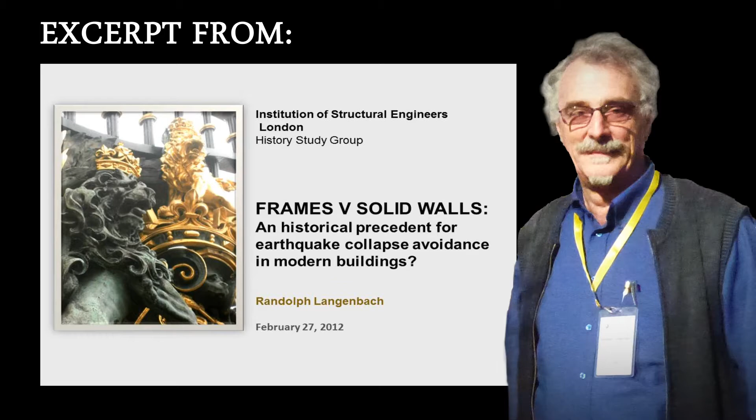It's a real pleasure to be here, and I feel a special kinship to be in Britain, because I took my advanced degree in conservation at York University, the Institute of Advanced Architectural Studies. So here we now move forward.

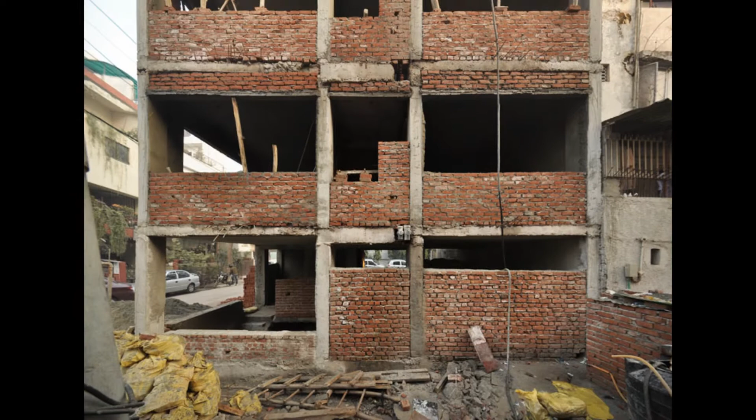And in my talk, I'm going to be talking actually quite a bit about modern buildings. By modern, I mean built in the last 50 years or so, rather than just looking at things historically. But I'm going to be making a crucial comparison. As you've seen in the last 4 or 5 months, we've had a series of earthquakes, and one in eastern Turkey, in Van. What are the images that are coming out?

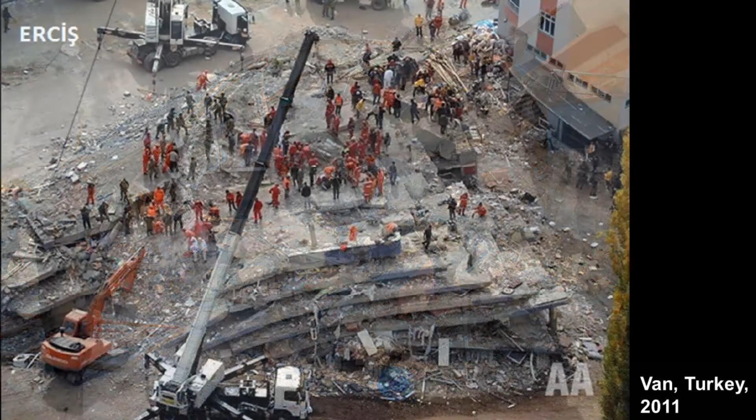They're concrete buildings. Not only have they fallen down, it's really with concrete frame construction that the term pancake collapse was invented, because the floors are so strong. And of course, when they do fall down, it's very hard to extract the survivors, because the floors, as you see here, often very thick, are so hard to even drill through.

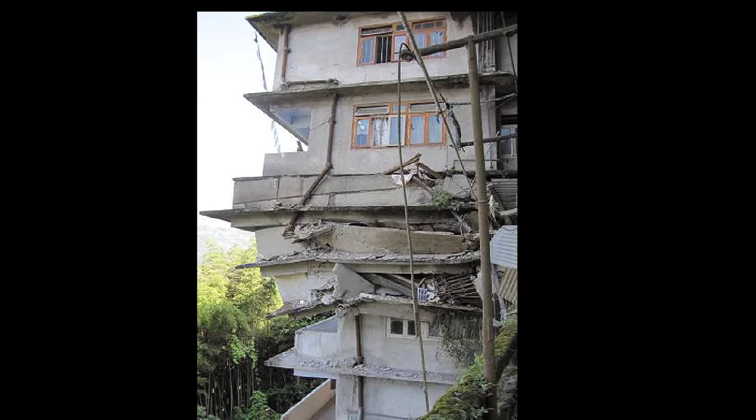The Van earthquake reminds me of the 1999 earthquakes further to the west in Anatolia, where it's building after building on the ground. And then very soon after that, the one in Sikkim, in the Himalayan chain in North India, which extended with damage in Bhutan and in Nepal. Same thing, concrete buildings.

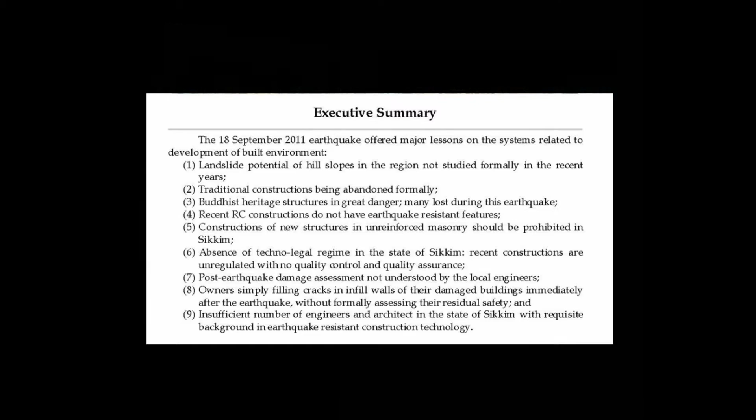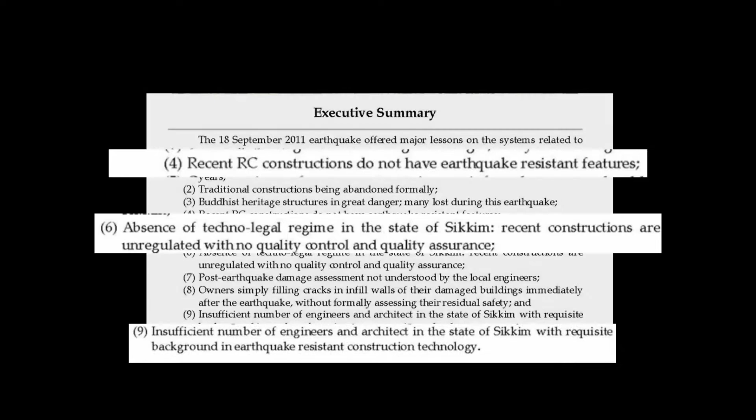Now, it's really interesting to look at the professional reconnaissance report that was done by an engineering team, and I do know one of the engineers on this team, the Indian engineers who went there to look at it. And this is really important to notice that not only are they observing that the reinforced concrete buildings don't have earthquake-resistant features, and remember, the Himalayan chain has been identified as an earthquake hazard area for generations, they don't even have structural engineers in that part of the country.

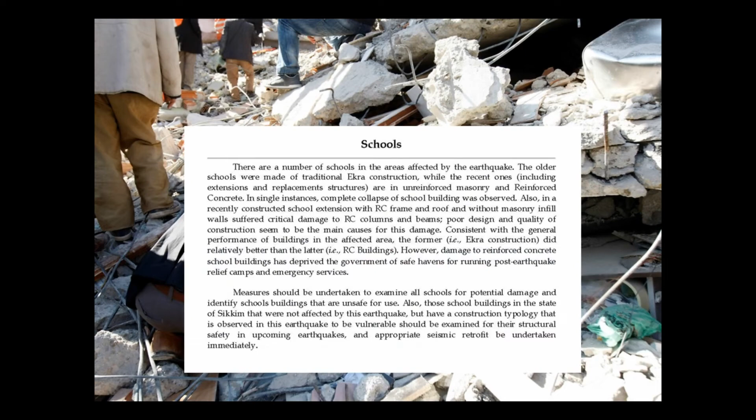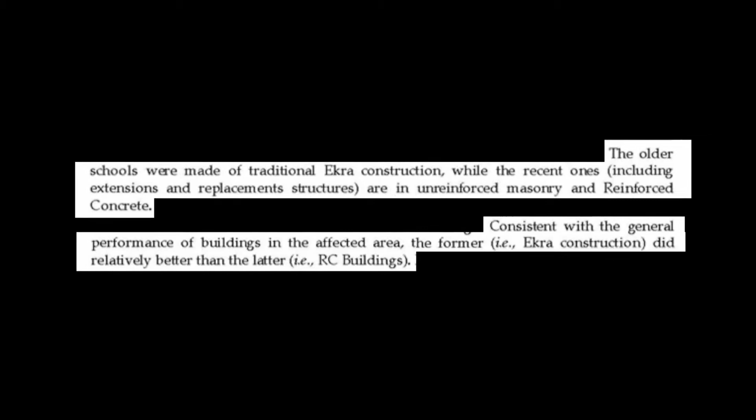With historical buildings, of course, by definition, they've been around for a while. So in this report, they recognize this traditional Ekra construction, which I think is actually a little closer to wattle and daub medieval construction here than to infill masonry. But never mind, it's easy to then realize that schools are one of the most vulnerable assets we have, and it puts all of the children at risk, whether it's Italy or India or Turkey or you name it. But you'd think that they would do better modern buildings.

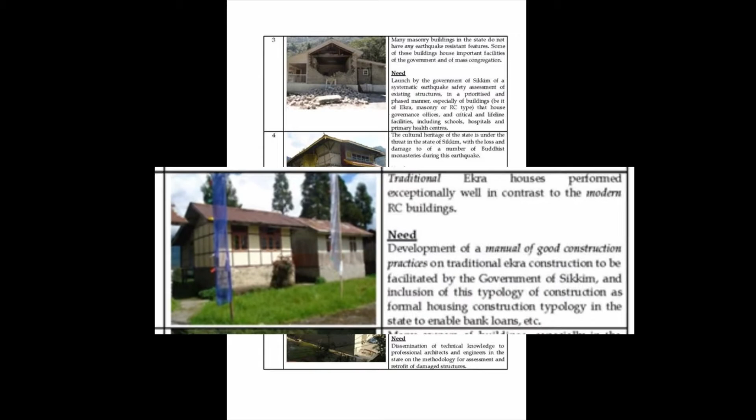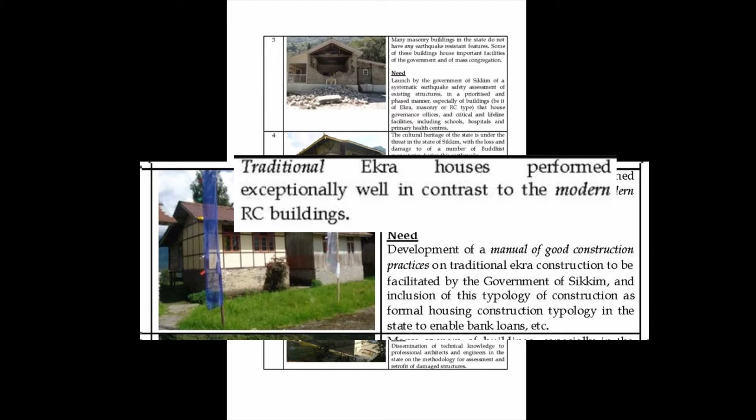And in India, there's the term puka and kacha. Kacha for cheap or impermanent construction. Puka is for permanent construction, which is now often identified as reinforced concrete or concrete block masonry. Well, look at what their observation is. The Ekra houses are the ones that performed. Traditional means of construction that this report even advocates be resurrected in this area and put alongside modern concrete construction, which itself should be improved.

Now, my work on this subject really began with my being in India on a fellowship to document the mills, the working factories in India, as a photographer, when I fell in love with Srinagar in 1981 and discovered they had a very traditional form of construction, and even almost a medieval way of life, much of which is rapidly being lost these days. But here you see the traditional construction in these narrow streets.

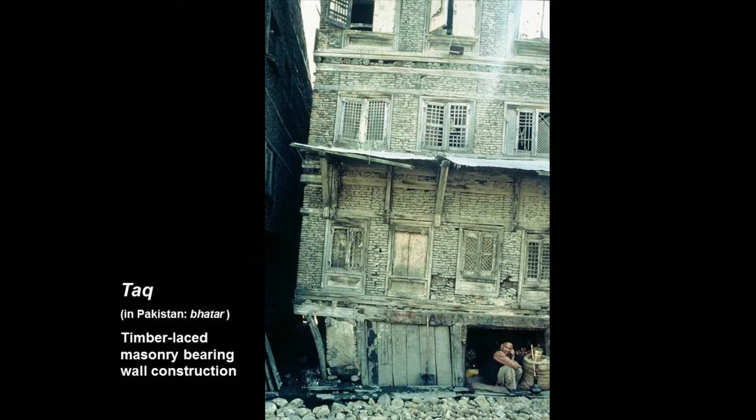I'm not going to dwell at length on this because I've spoken of this before, and this book is now published by UNESCO, where I go into great detail about the earthquake resistance of the kind of construction I found there. And I came up with this name because what I really came to realize is that traditional is modern. That's the insight that I feel I have. We should no longer use the term archaic construction, because it has so much to teach us in terms of how we improve our current forms of construction. So moving on, that's one of the pictures that I shot in 1981.

And I often have shown this at the beginning of a talk and say, you know, how can you ever believe that this would be earthquake-resistant construction? Never mind, is it even resistant to static failure?

So, and when you get into it, you even see that the masonry piers do not line up, which would be anathema in a bearing wall masonry building. But this is bearing wall masonry, and by all calculations, that would be a soft story. And so the timber is so critical here.

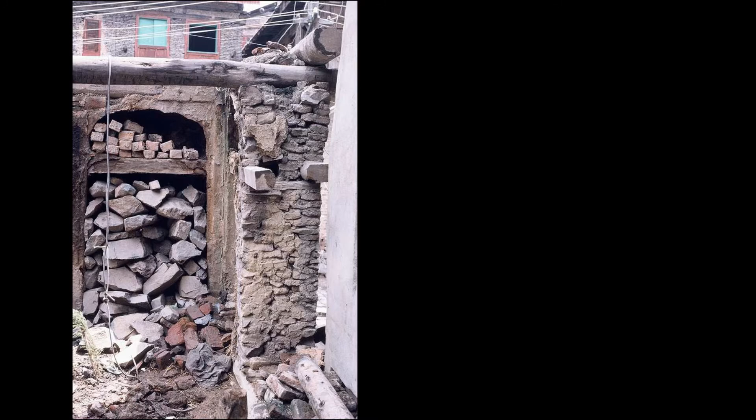We are dealing, in fact, with reinforced masonry construction, but coming from a building tradition that goes back hundreds of years in an area of northern India where timber does exist, does grow. It's a mountain climate, and the Vale of Kashmir is a fertile plain.

The reason why these buildings were there is because it was a fertile plain, but it was a prehistoric lake bed, much like Mexico City is a lake bed. And so this is an extremely soft soil site.

This construction was not invented for earthquakes, I believe. I don't have any proof one way or the other, but it was invented for building buildings that would last on a soft soil site. And that's why I think we're seeing the timber armature there.

And you can see the effectiveness of this when you realize that this building here is a bearing wall masonry building. It's not a veneer, it's not a frame structure. So how is that done? And this is what I determined is the way those internal frames work.

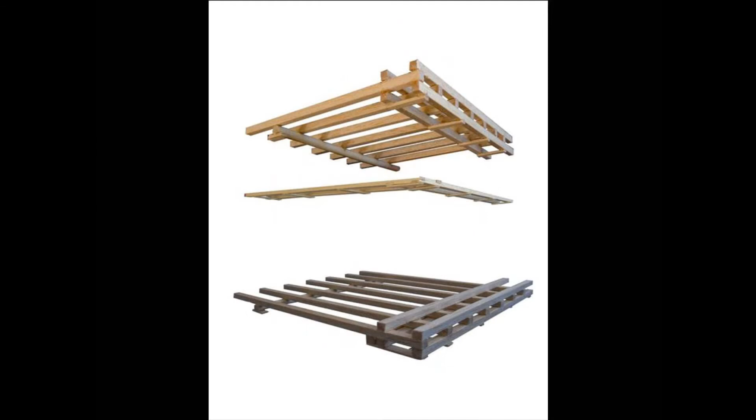They've been even very effective in creating, through just the weight of the wall, a tie-in with a floor diaphragm, which is all, of course, appropriate for contemporary construction today. And that's where they fit, above the windows and at the floor levels in many of these structures.

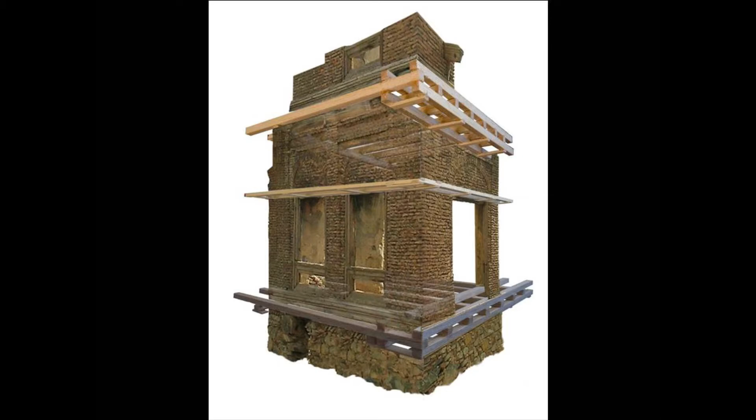This, I determined the best word they had for it was taq construction, which was not exactly an engineering term there, but I found no other. It just seemed to be a construction technique that people did. Looking at the buildings, we're not dealing with short buildings here. They went 3, 4, 5, sometimes 6 and 7 stories, and these are bearing wall buildings.

This one here, you can see where the floor beams are extending through the wall and being sandwiched between the timbers front and back of the thickness of the wall. Absent this kind of structure, you can see that the buildings tend to come apart just from the soft soil site.

And in 1885, there were historical records where visiting British travelers commented on the earthquake that they experienced, that these seemingly rickety, tumble-down buildings had resisted the earthquake, whereas the palace in the more British style of unreinforced masonry had fallen down.

At the time when I discovered this, I'd never myself investigated earthquakes, and therefore I'd not been in a reconnaissance, I'd not really studied contemporary earthquakes. That has come in the last 30 years since I first went there.

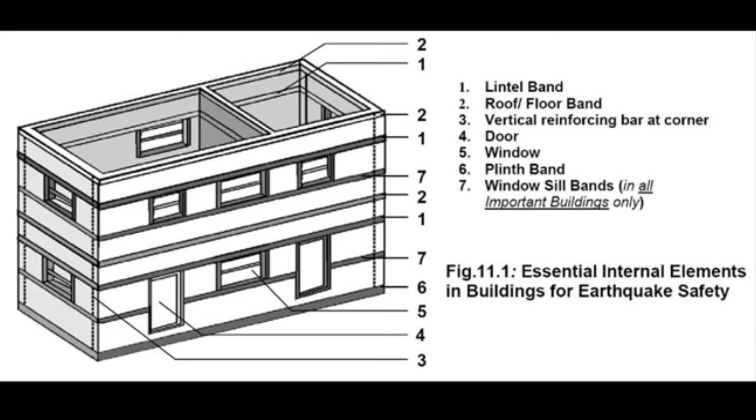But what I found interesting, and some of you who've been involved perhaps with India may know Professor Anand Arya, who was instrumental in getting this material into the code and recognizing essentially what they call rules of thumb for traditional construction, non-engineered construction as they call it, in India, because it's so fundamental to housing the people.

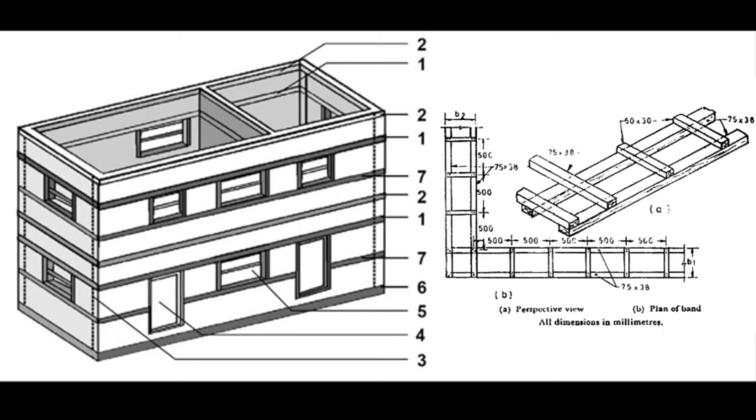But for some reason, they don't recognize the floor capture, the double layer of timber with the joists and the beams coming through. And I've never been quite sure why. In my conversations with him, I think it was just something where they would themselves know it, but hadn't really gotten into that level of detail.

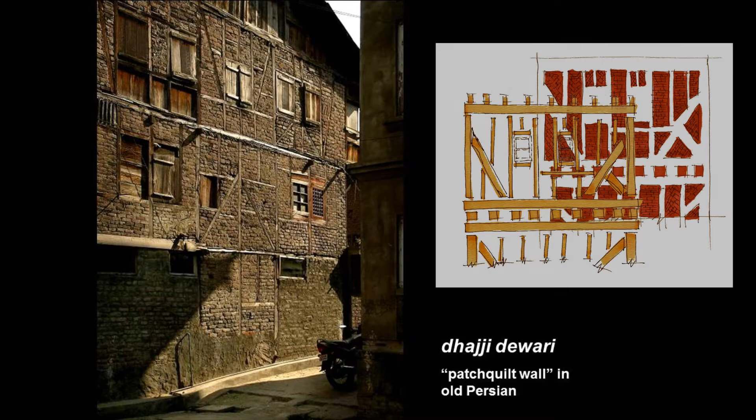So the other system is known as Dhajji Dewari, and this is a much more appropriate term to the system. It comes from their textile industry background, patch quilt wall, from what it looks like. But that's really interchangeable with the English term of half timber. And you find Fachwerk in Germany and colombage in France and so on. Almost every society in the world has a version of this form of construction.

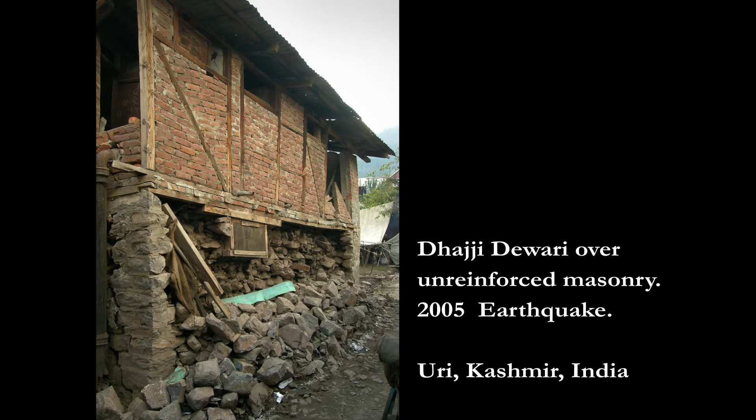Is it specifically earthquake generated, earthquake resistant? No. My belief is that in an area where wood was available and reasonably inexpensive, this becomes a very inexpensive form of construction. It's for socioeconomic reasons that something like this would develop, just the way it did in Suffolk and Norfolk in Britain, because just think of the efficiency of only having to build one single leaf of brick, which is all that this contains, just as it often did, I think, in the medieval construction here.

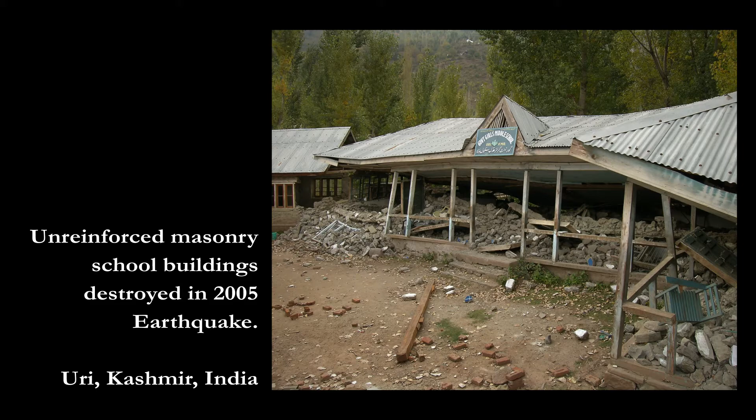Again, interestingly enough, it is recognized in the Indian Building Code. But like the other one, it doesn't talk about the floor diaphragm connection.

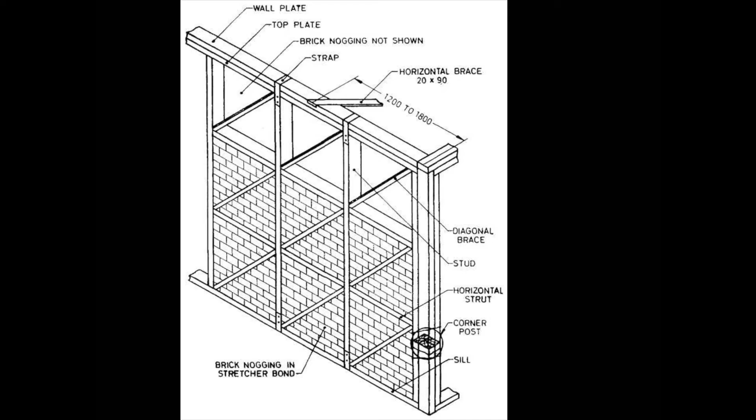Now, one of the first and one of the very few examples I have of where this is specifically an invention to resist earthquakes is a product of perhaps Europe's most famous earthquake, not in Italy, but in Portugal, the 1755 All Saints' Day earthquake. It happened when everybody was in church. So you can imagine when the churches all caved in and killed their occupants, how this became almost a mystical event. And looking at the science of it was probably the last thing on many people's minds.

And then it was followed by a fire. And then, after everybody ran out of the area that was burning down to the pier to take boats across the harbor, a tsunami came in and drowned them. So it was this 1, 2, 3 punch that just turned this into quite the event for all of Europe.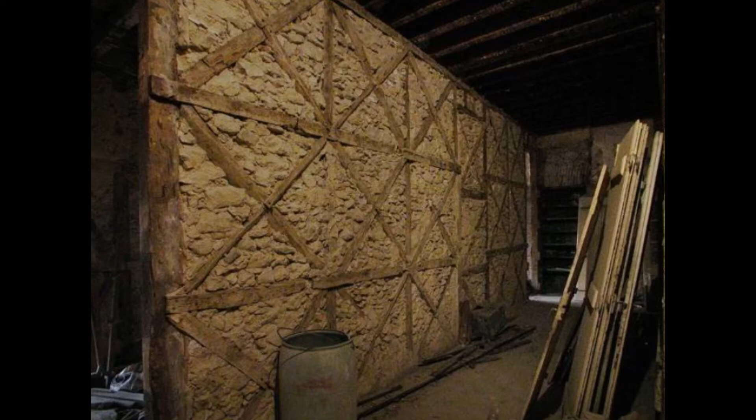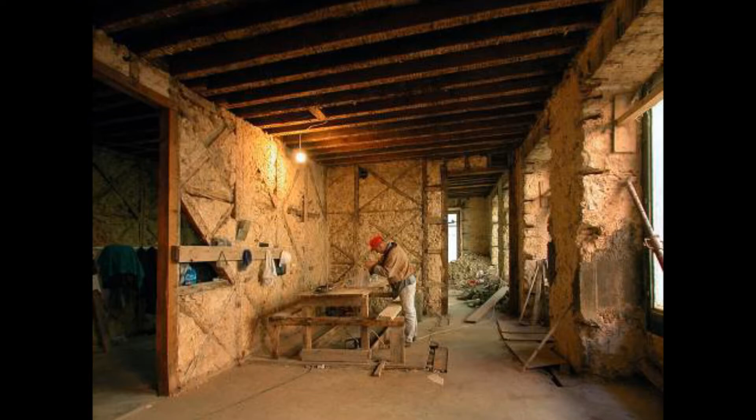After that earthquake, the man who later became the Marquis de Pombal, who was the king's right-hand man at that time, took on himself the task of getting all of the best minds, all of the best engineers in Lisbon together to come up with a system that would be earthquake resistant. Interestingly enough, what they chose to be that system is infill frame masonry, just like I showed you in Kashmir, and not unlike Fachwerk in Germany or half timber in Britain, but a very robust form with double X's in it.

And there's not really very good records on this. I believe what they did is they simply did an empirical study. It's not a mathematical study. It's an empirical study, as we often do, like EERI teams to earthquake areas or other reconnaissance teams, where you go and gather the evidence from the earthquake. And what did they do just walking around the city? They noticed the medieval parts of the town that had half timber construction didn't fall down.

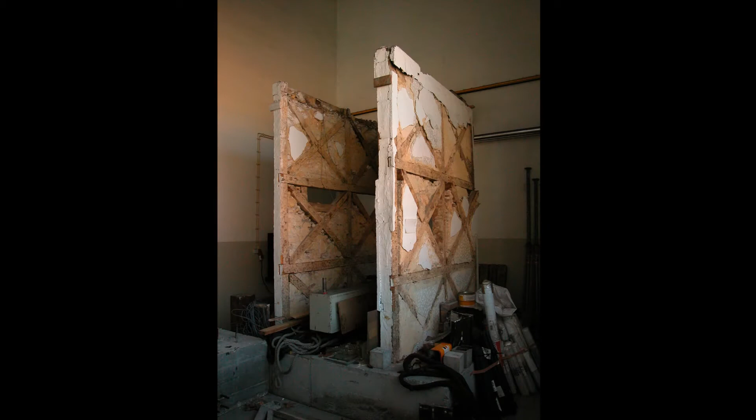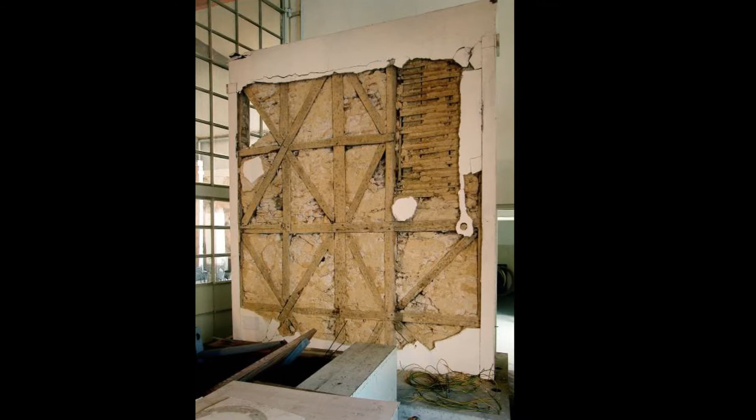But the unreinforced masonry buildings did, and the churches certainly did. Well, interestingly enough, in just the last few years, the government of Portugal and the engineers working on a government funded project took out some of these frames from buildings that were being renovated and the frames were being lost, and put them on a stress test, a pseudodynamic test machine that they have in their government lab.

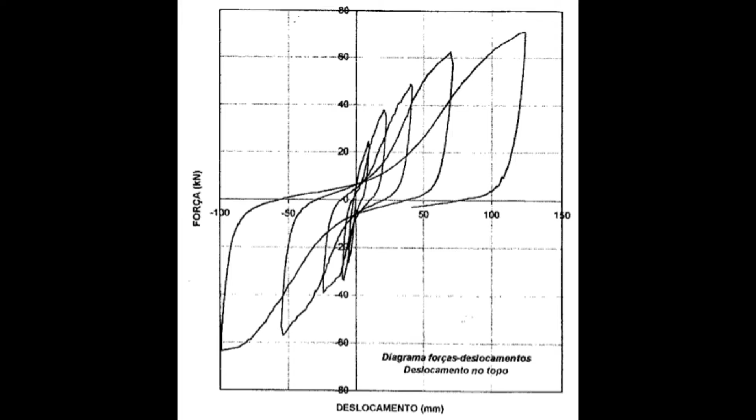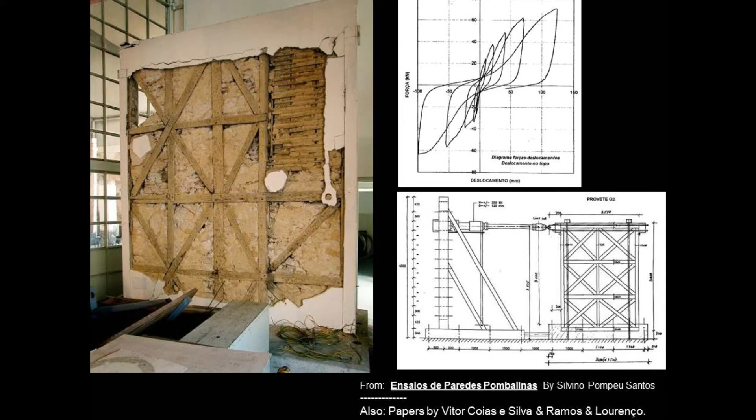And this is the hysteresis loop that came out of one of those tests. In this particular case, the equipment got to the end of its thrust before it ever got to the limit of the strength of the specimen. So the performance of this is seen with a tremendous amount of damping effect in it, of hysteresis damping that comes from this material as it's moved back and forth in the earthquake.

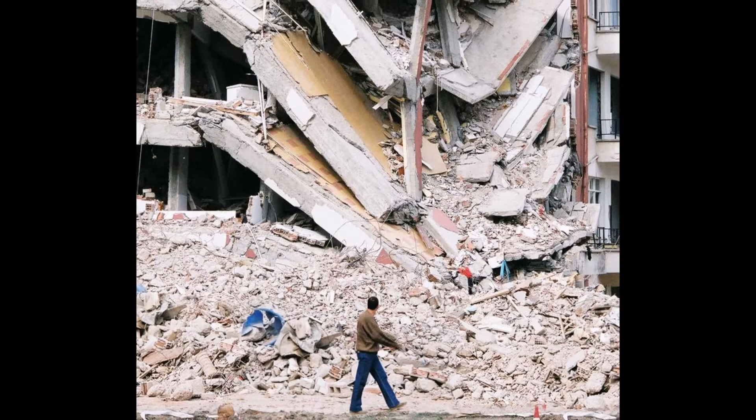Now I'm going to just take you very rapidly through a series of earthquakes that I've been able to visit and see the results from. And of course I mentioned before the one in Western Turkey. But tucked in among these buildings were buildings that were often not recognized or put in the reconnaissance reports. My colleagues in EERI in the US had come back and I say, were there any timber frame buildings that you saw there? And they say, well, there were a few. I saw them. But did you take pictures of them? No, I wasn't interested. We were looking at concrete and so on and so forth.

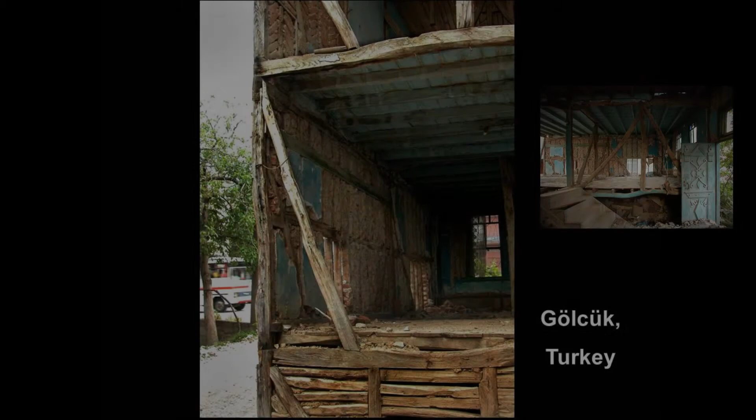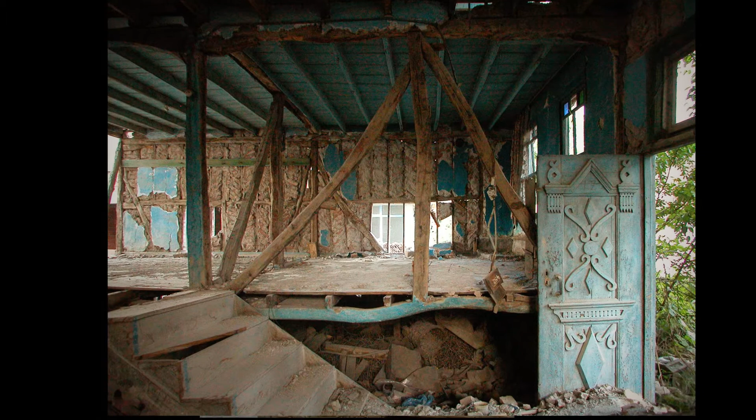This is non-engineered construction. And what you're looking at here is not a building that was damaged by the earthquake, but one that had the back wall quarried away for building material because it had been abandoned for something like 20 or 30 years. And it was in the heart of the damage district. The earthquake couldn't take it down even when it was in this condition.

An example from another photographer. Everybody says, well, the concrete building's ever so much bigger. So there's a scale difference. You have little buildings and big buildings. How can you condemn the performance of the big buildings by example of the little buildings? Well, we've seen small buildings also, concrete, have not done well. And next to them, here is another one of these, in Turkish known as himiş construction.

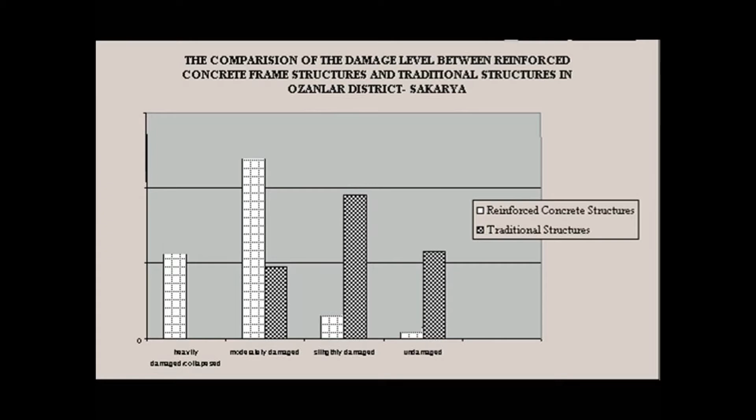Well, it's one thing to go around as a reconnaissance photographer and looking at these things on the fly, but there was a research team in Turkey that did a quantitative study. And they, in my mind, unfortunately, lumped together all traditional buildings, including unreinforced masonry construction, into the bars you see on the right, and on the left is the reinforced concrete frame buildings. So embedded in these bars on the right are the himiş buildings, probably with even better performance than other traditional buildings that may not have performed so well.

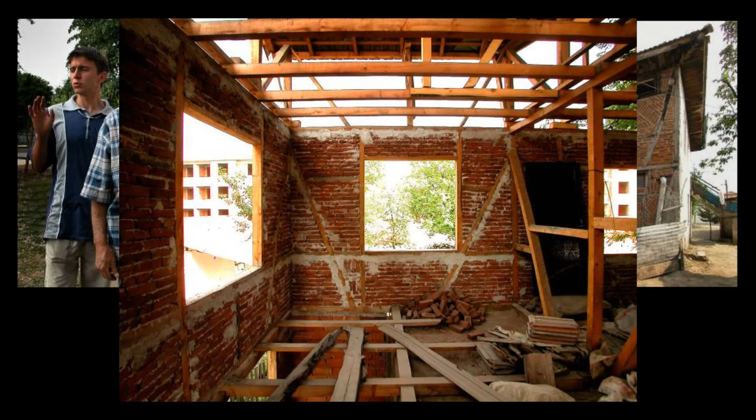So we have one example here of a family I ran into when I was in Düzce. This man had started construction on a reinforced concrete new house for his family. And they were living in the house his father had built, which is seen there. This is after the Düzce earthquake. And he stopped construction when he saw that the concrete buildings in Düzce had collapsed and built himself a himiş-style new house. I thought this was a remarkable example of how people learn and how a tradition can be resurrected when an event as rare as an earthquake comes through and affects it.

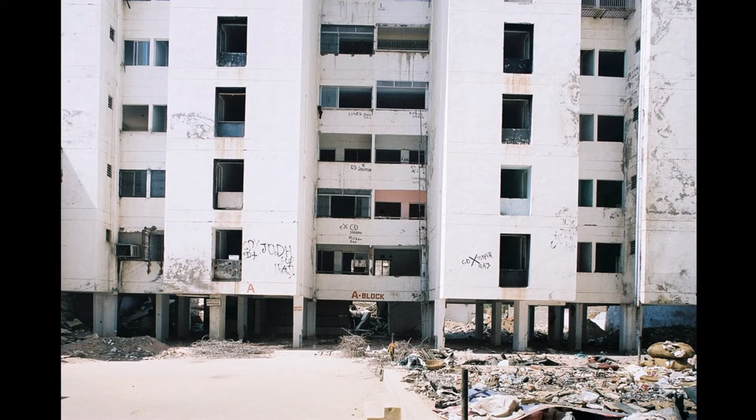And in Ahmedabad, if the concrete building was built subsequent to 1992, it had a much higher chance of collapsing than if it were built before 1992, as counterintuitive as that might seem. And that was for a simple reason. They made a zoning change that gave them more floors credit if they put parking underneath. Excuse me? I mean, this had historically been a known earthquake area. In fact, the earthquake return period there had been remarkably frequent for an area that was mid-plate.

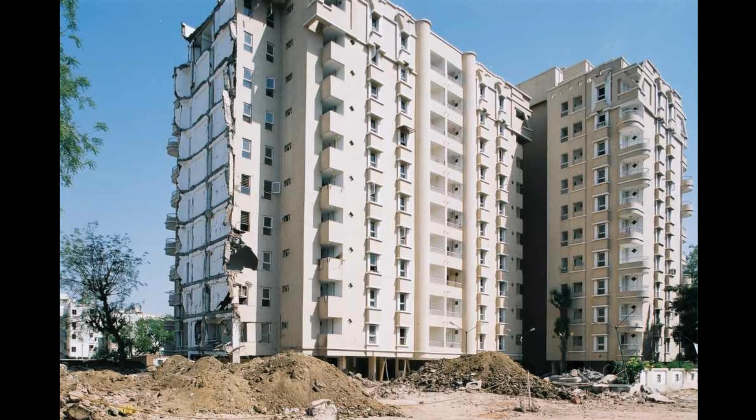So you see, half this building had collapsed in a pancake. The other half is effectively destroyed. The bottom columns, it was scary even to go under there and have a look.

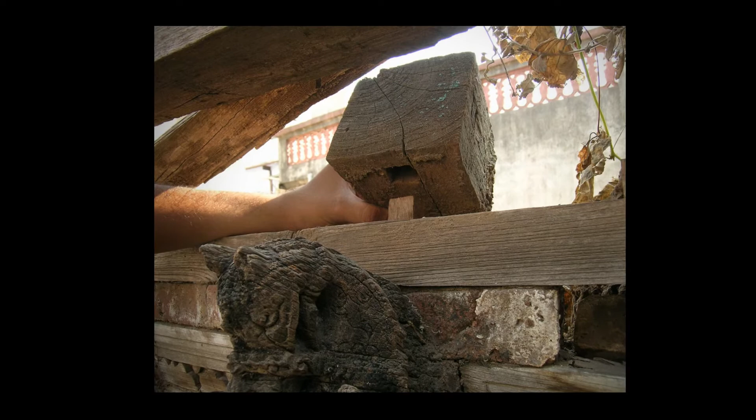Why the difference? Well, there was a cultural flow of construction tradition that flowed into Islamic Ahmedabad of the Mughal period that didn't really go into Hindu Bhuj. And it's not a religion thing, it just seems to be cultural byways and highways flow.

But there was a Hindu sect that had their home temple in Ahmedabad, known as the Swaminarayan sect of Hinduism. And they had built a building in the Ahmedabadian tradition in Ahmedabad. And they then also had a temple complex in Bhuj, and they used the same Ahmedabadian building tradition in Bhuj.

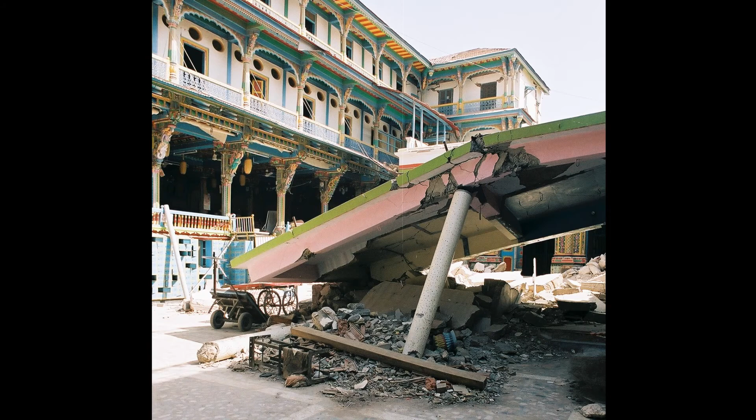But as we went around there, it was very interesting. I'm just going to show you one particular experience we had going very deeply into the remote countryside, way away from where government assistance would normally get to until weeks later. And we found this one little rural village up on the top of the hills where people were living in tents. And their houses had collapsed.

They were largely of rubble stone, and their own store, which would be the premium building in the town, had a soft story collapse. But the house there looked undamaged. And we looked and investigated this, and it was dhajji construction, dhajji dewari construction.

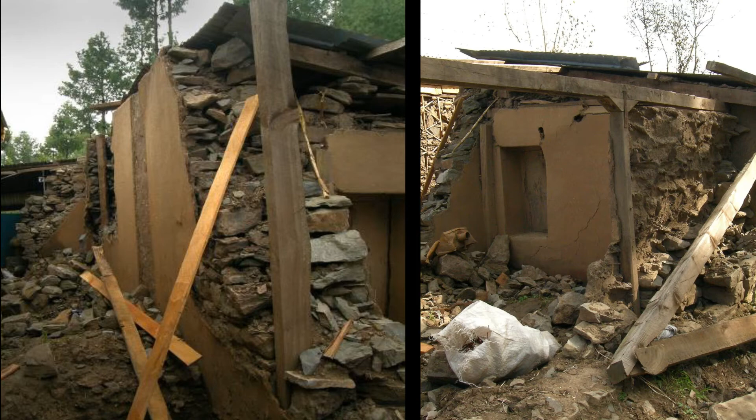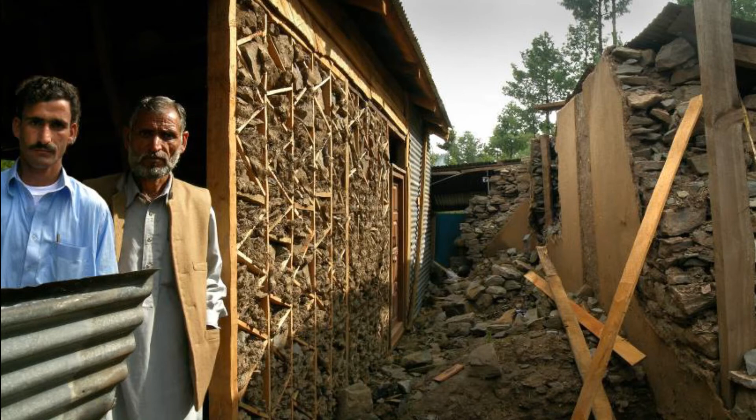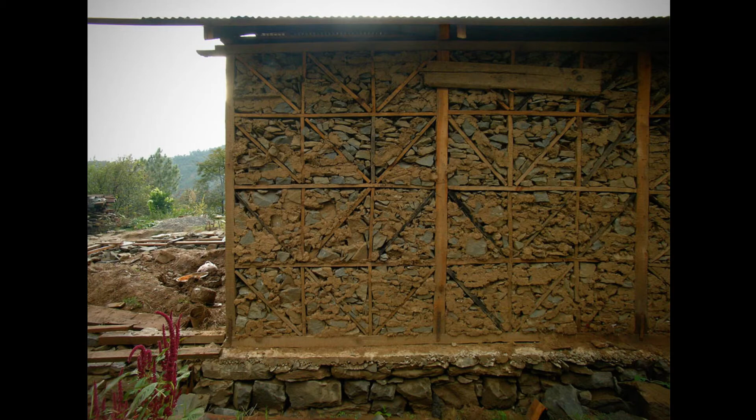This one family, for example, lived in this house that you see there with the rubble stone. And there on the left, you see the owner and his carpenter. They rebuilt their house in dhajji construction. The mountain form of traditional dhajji construction is more of a stud frame with these small, short pieces and tiny panels, which I think evolved out of the fact that they use rubble stone as the infill.

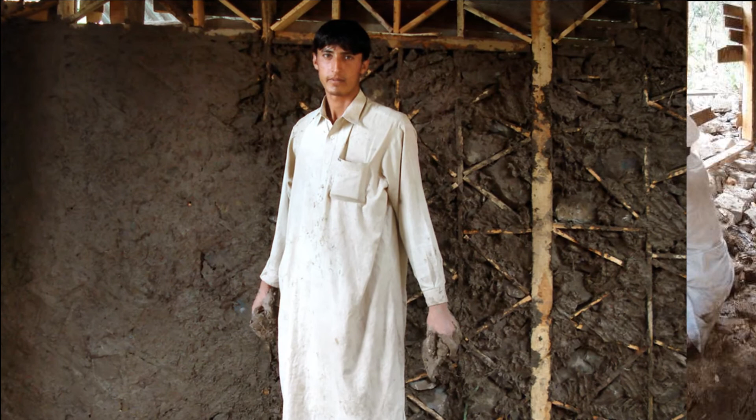So the smaller the panel, the more frequent the timber reinforcing, you get a very good holding of the system together. And the amount of damping that comes from this in the event of an earthquake would be quite large, and the chances of the building falling down from the panel falling out are even less. People were proud of this.

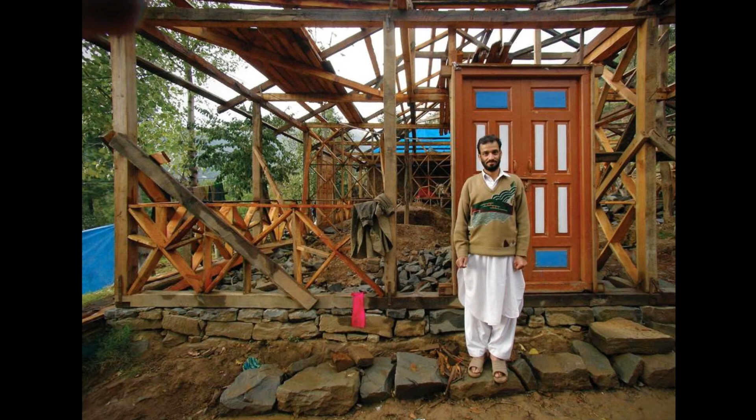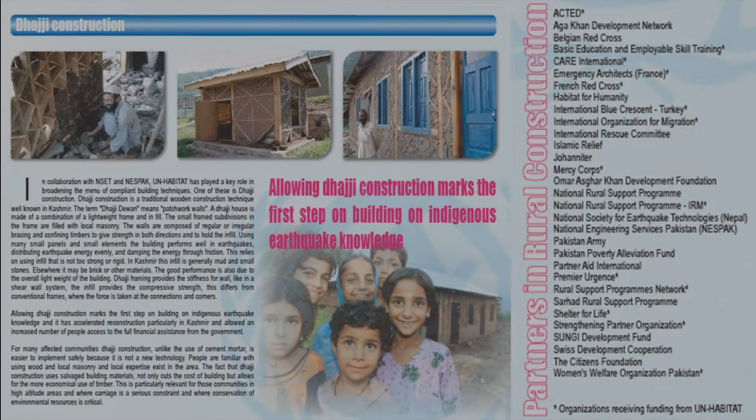The government had told everybody that they would get financial assistance if they built in reinforced concrete or concrete block according to the rules that had been established by their engineers. And if they built in any other system, they would get none. At the time we examined this, it was about a year after the earthquake, they went ahead and built anyway. At that year point, the government approved, after several of my colleagues in NGOs had been campaigning to approve this form of construction.

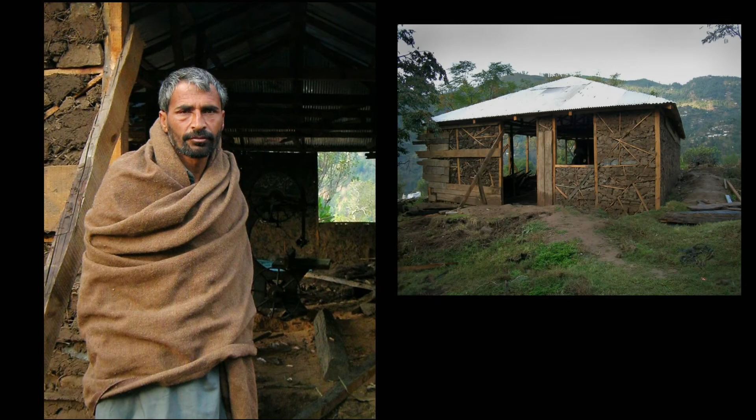I show this picture because this fellow is even deeper in the rural countryside. And there's something really wonderful about the poise of this fellow. I mean, he probably has not spent a day in school. He's never been trained in construction, presumably, but he's rebuilding his own house in this way. And I kind of see a wisdom in his face.

Not knowledge, but wisdom. And I think that that's what's so profound about getting into this level of seeing how people relate to their environment and then take control of their own recovery. And the government of Pakistan, to their credit, finally recognized this.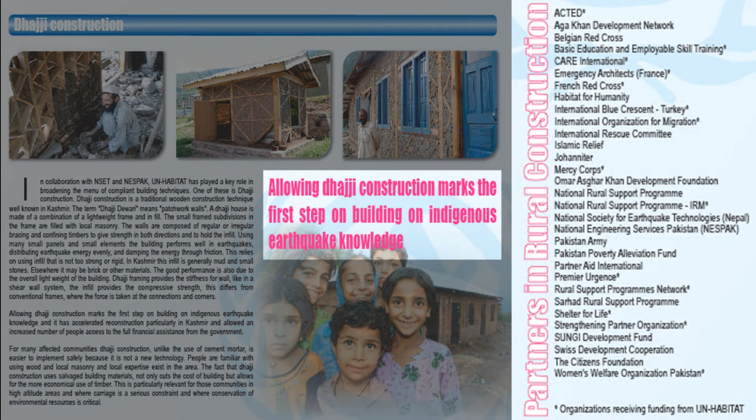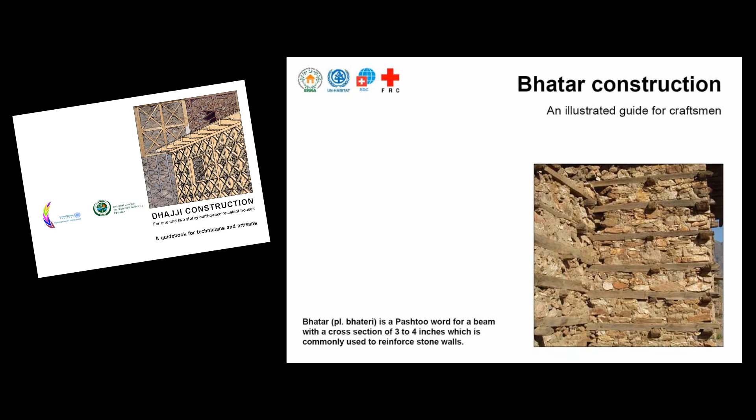And then my colleagues in the NGOs, particularly this architect from Switzerland, Tom Schacher, who is now in Haiti doing similar work, put together a manual of practice for improving the detailing of these buildings, but working within the tradition that he learned from them. I think that's what's so important, that it's a two-way conversation.

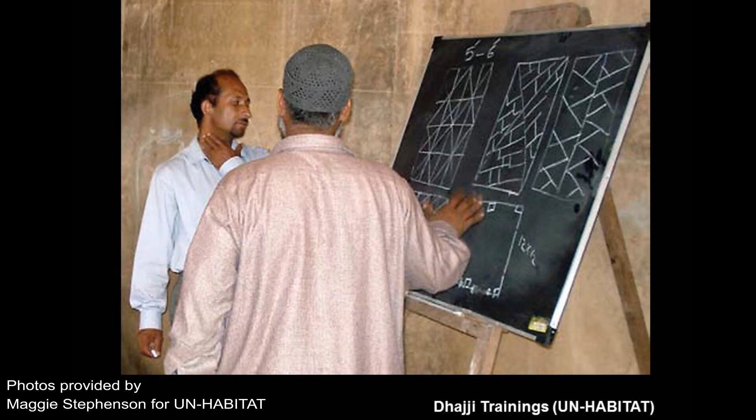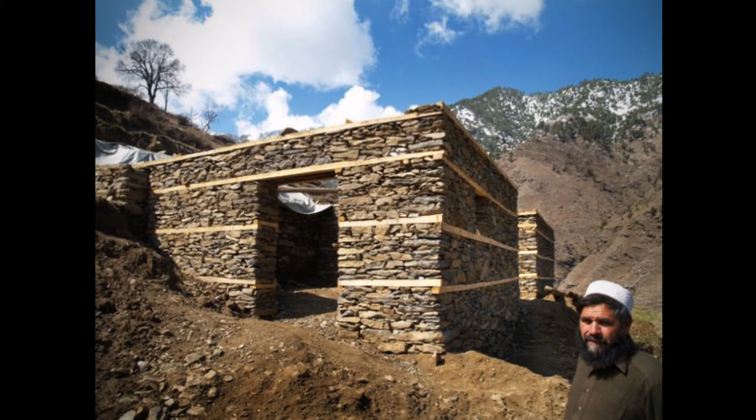And here you see some of the lessons undertaken with these rural farmers, basically. And they then, one year later, approved the bearing wall system, which there in Pashtoo is known as Bhatar. And so these are new houses, over 200,000 new houses in dhajji have been built, I've been told, by UN Habitat.

So I want to conclude the talk back from big to small here, and just leave you with the experience I had in rural Turkey, where these little villages were in an earthquake that was 6 months after, and a year after the big earthquakes that you've all seen or read about in Western Anatolia, the Orta earthquake of 2000.

And I happened to be driving to go see the historic city of Safranbolu when this earthquake happened. I got a phone call on a cell phone, and I got there within less than 24 hours of the time when the earthquake happened, and have pictures of these houses, which are of traditional hımış construction.

Well, the government officials and inspectors came in and persuaded the occupants of this town that their buildings were essentially destroyed and they're better off tearing them down and moving to new houses that they will fund. And in a neighboring town, there were two towns this happened, this is the subdivision the government built, because the geologist said that this site was safer than where the village was down by the creek.

No barns, no place, and not even agricultural soil left on the site. And they put these houses here, 80 houses, that the poor owners were persuaded to accept as a program for rehousing them, and even partly pay for.

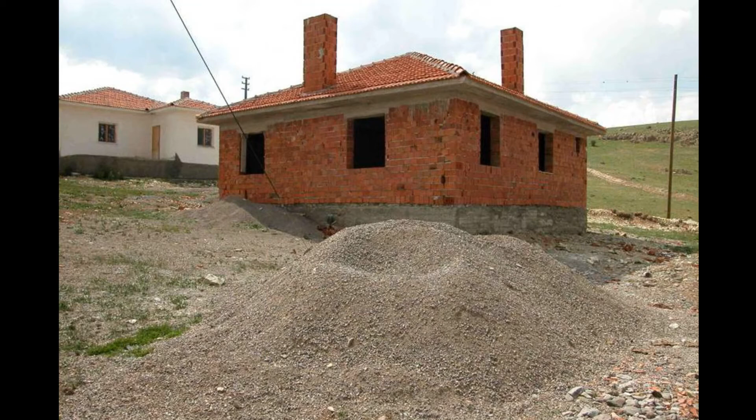They were never occupied. Only 5 of these houses, 5 years after the earthquake, were occupied, and the population had risen to 7, and 2 of them moved back to the village. Because there was no mosque, there was no store, there was no place to put your animals. On top of that, that was the system of construction. Unreinforced masonry, hollow clay tile block with a heavy concrete roof.

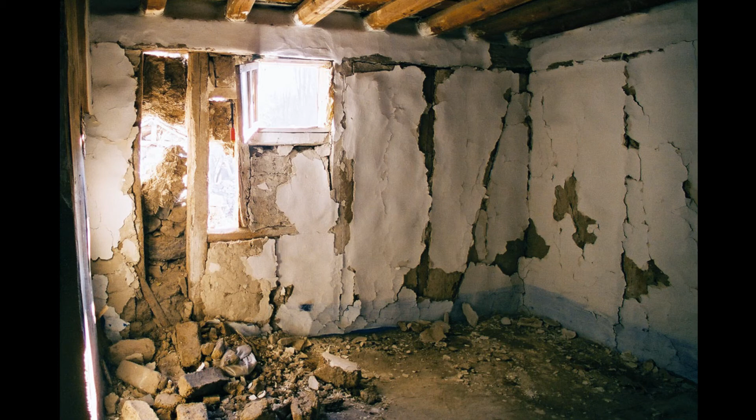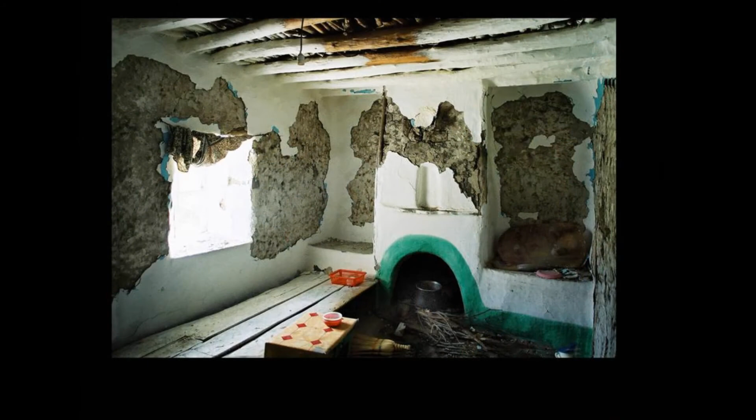So the problem for disaster relief people is the disasters are so far apart that it's a whole new host, a whole new generation of people with each one. And the learning process, I think, the passing on of this kind of aha moment, oh, maybe that isn't good policy, does not happen. They start over again, and with the best of intentions, produce something that takes away more than it gives.

And I want to leave you with that observation from all of this. We're back down to the people in the village who, in the end, in order to recover, are best able to recover for themselves, to rebuild their own houses. And we can look on and learn from them, and then give back something after we've learned.